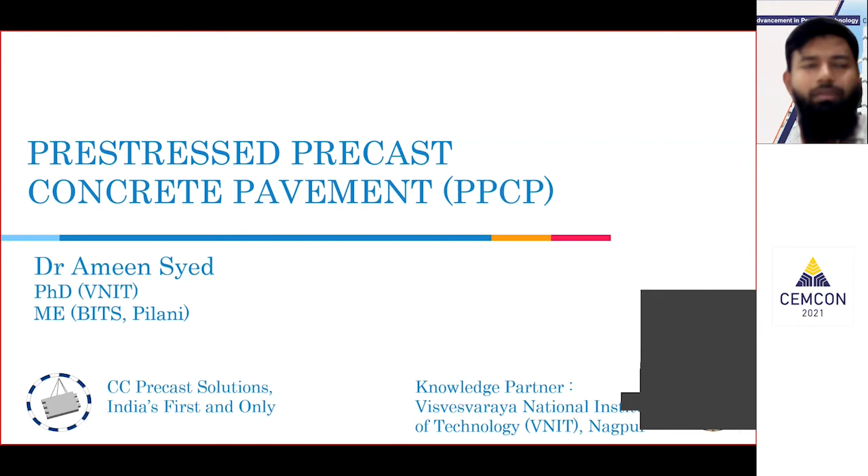As ma'am has already mentioned, I've been working on pre-stressed precast concrete pavement technology. I've completed my PhD in this topic and presently run a company, CC Precast Solutions, which is involved in the construction, design, and overall management of precast concrete pavement technology. This basically started off with the guidance of my PhD mentor, Dr. RS Sonparote. He is an associate professor at VNIT, and the idea of precast concrete road first came to him because of one situation that we faced.

So that inspiration was mainly because we had road construction ongoing right in front of our VNIT campus. His home is hardly a kilometer from there, but just because of that under-construction concrete road, he had to travel almost 3 kilometers to reach his place. So he had this thought: why can't this process be faster? If you make a bituminous road, that works out very fast, but a concrete road takes a lot of time. So he gave me the responsibility to check if there is any scope for development of precast concrete road.

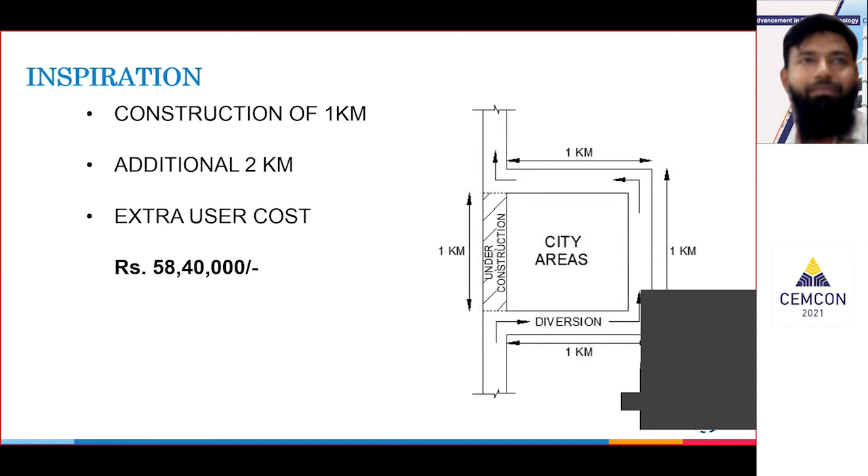So that's why I got into that literature review. And by simple math, we found out that construction of a simple 1 kilometer road requires an additional user cost of 58 lakhs just because of that diversion.

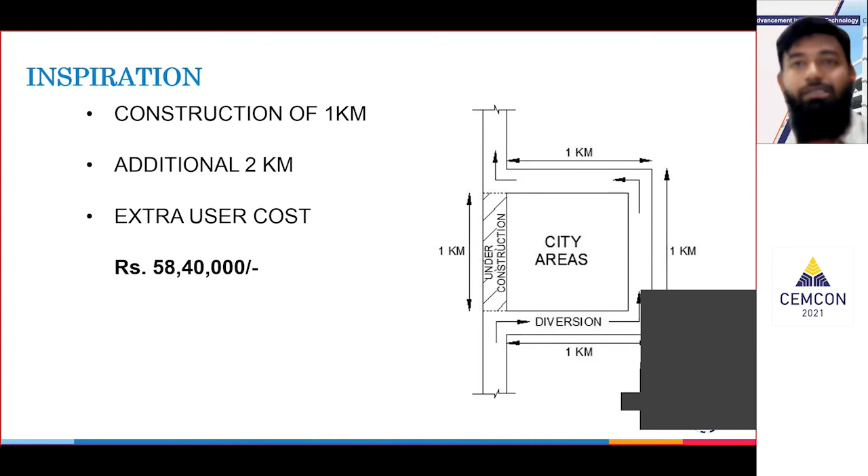Another issue that we faced soon after completion of the concrete road project right in front of our campus - this is the same picture of that road. There were tire marks, pug marks, footprints - all kinds of problems in the quality of that pavement. There were cracks. All of that was because maintaining quality at site for a concrete road is really difficult - it's very hard to stop the crowd, especially when there's traffic jams right next to the road where the diversion is. So people tend to ignore the freshly laid concrete and drive over it whenever required.

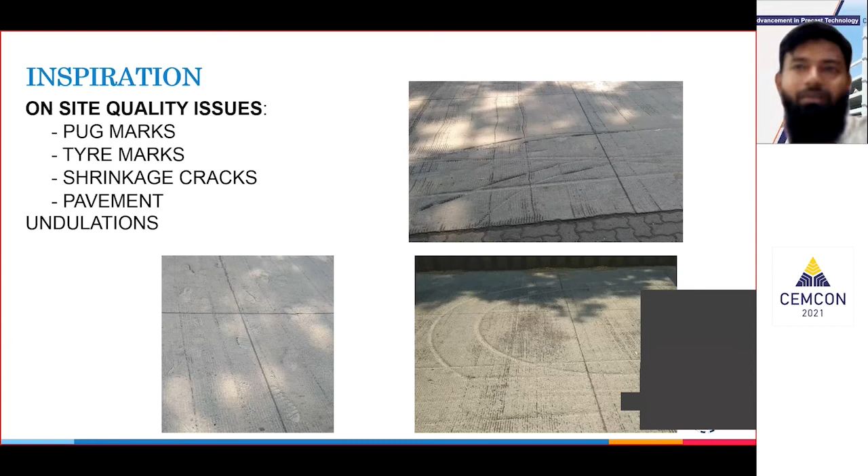We targeted this problem, investigated it, and this is the statistics we got. Traffic congestion in itself causes 1.47 lakh crore annually in a few metro cities in our country. So the cost due to traffic congestion is mainly because of the user cost, reduction in quality, and the cost due to road closure. All of that cost piles up.

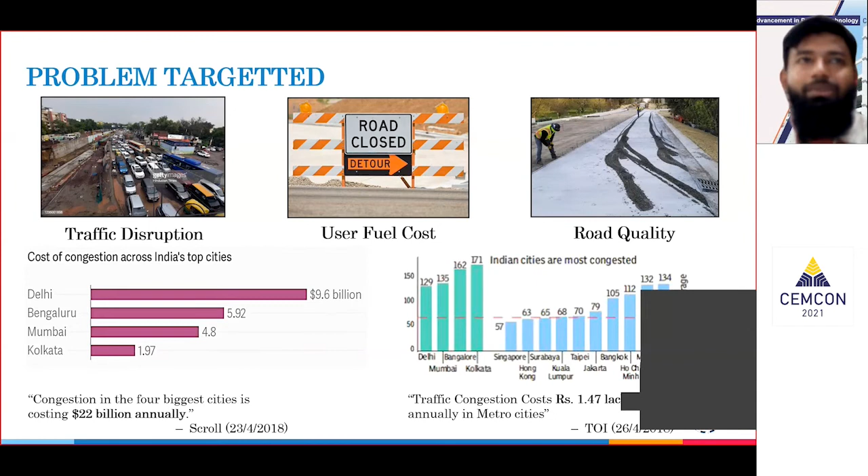So how can we reduce that cost and optimize this process to make a better quality pavement? Adding all of that up, we moved on to this technology.

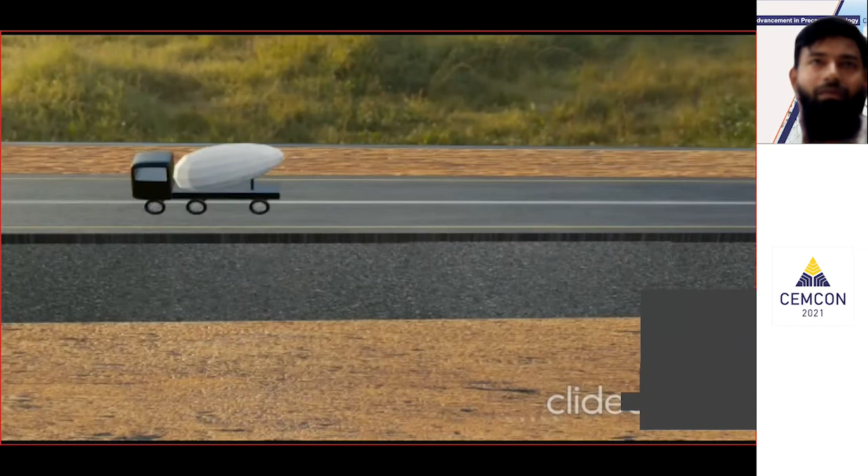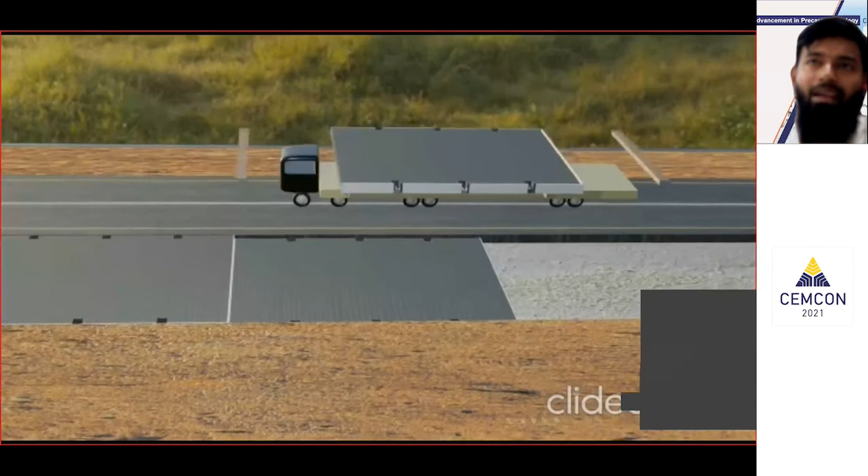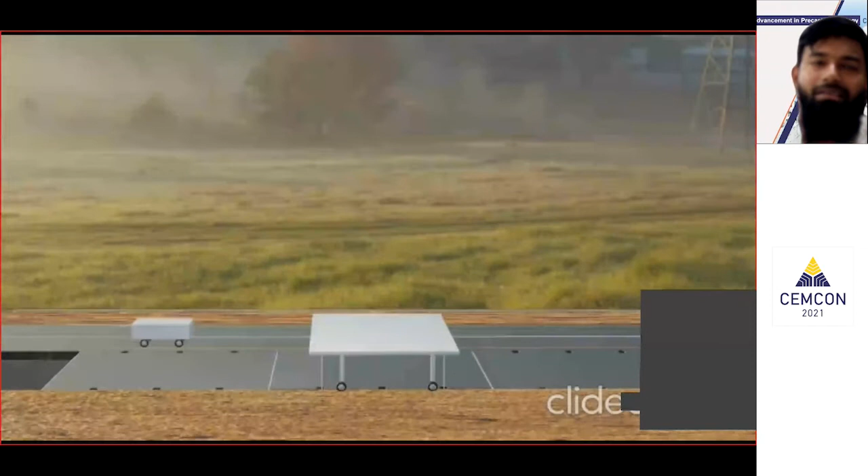This is a brief video, I'll play it now. The simple process goes this way: the milling is done, so the top BT surface is removed and a simple leveling course is laid over it. The panels are transported to the site and simply lifted via crane and placed. Once the panels are placed, if there is any minor undulation because of the base, they can be fine-tuned, lifted, and the base is grouted. Once the base is grouted, the panel fixes into its own position. Then the panels are joined using dowels.

I'll show the details in the coming slides also. The gap in the joints is filled with grout. After this process, traffic can be allowed immediately. This process can basically be done even overnight, and as can be seen here, ramps can be provided.

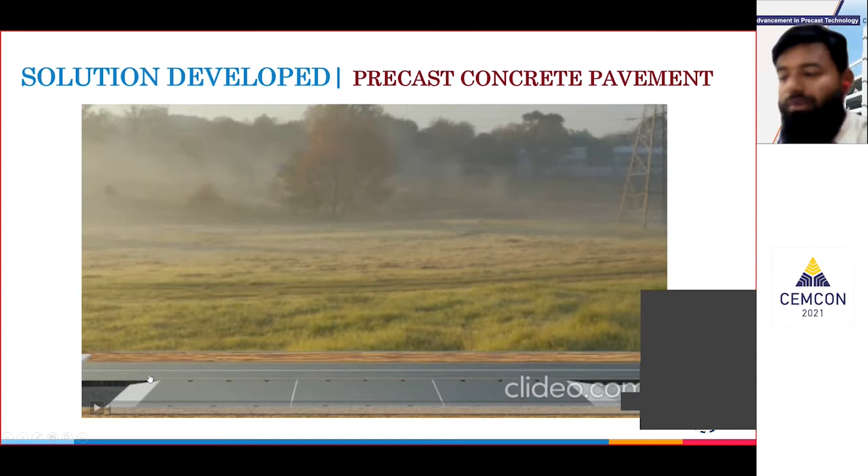Simple ramps can be used, and traffic can be allowed in the morning. The main advantages of this technology are fast construction, and as said by previous presenters, high quality due to the controlled environment in the casting yard.

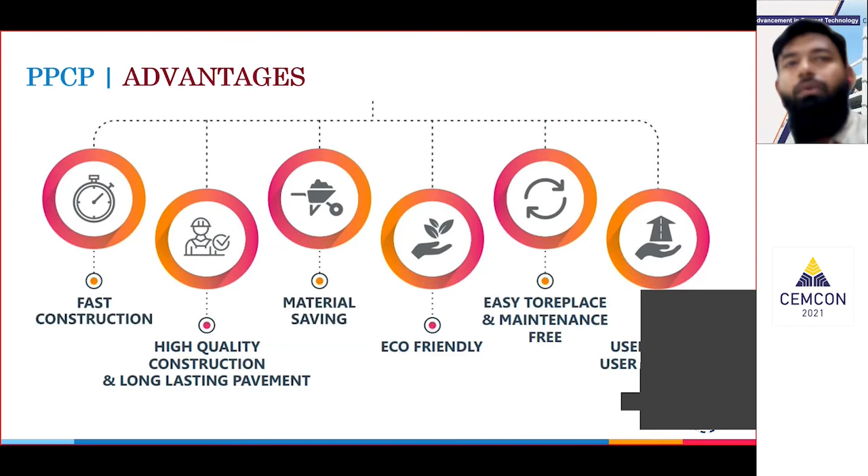If we use pre-stressing or pre-tensioning, there can be considerable material savings, which reduces the burden on natural resources and makes it more eco-friendly.

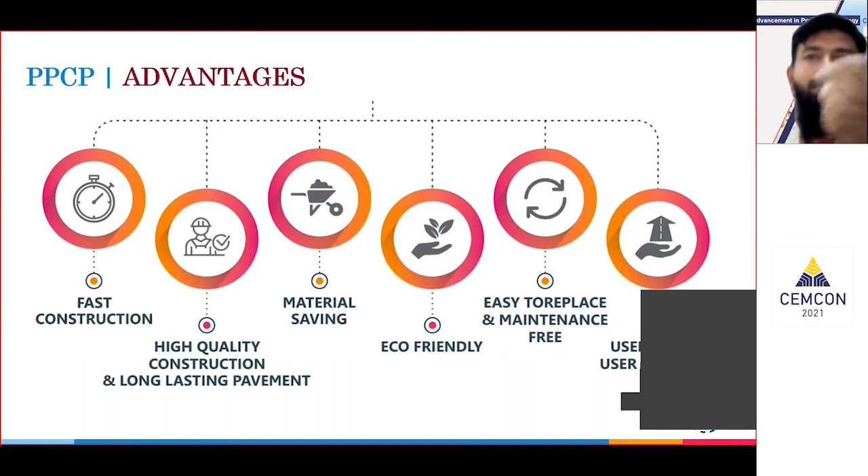We are in the process of developing a precast panel which can be removable, so replacing any pipelines or conduits beneath the road becomes really easy. You can remove the panel, lay the pipes, and reuse the panel.

The limitation is it does not address a weaker base, as any road requires a strong base. If the base is not strong enough, whether it's a concrete road, bituminous road, or precast road, it will be damaged.

Availability of casting yard is not much of an issue; one casting yard can easily cater to a 70-kilometer radius. Skilled labor is required for any precasting work, and lack of awareness and acceptance is a big issue for precasting technology to be accepted, especially in our country.

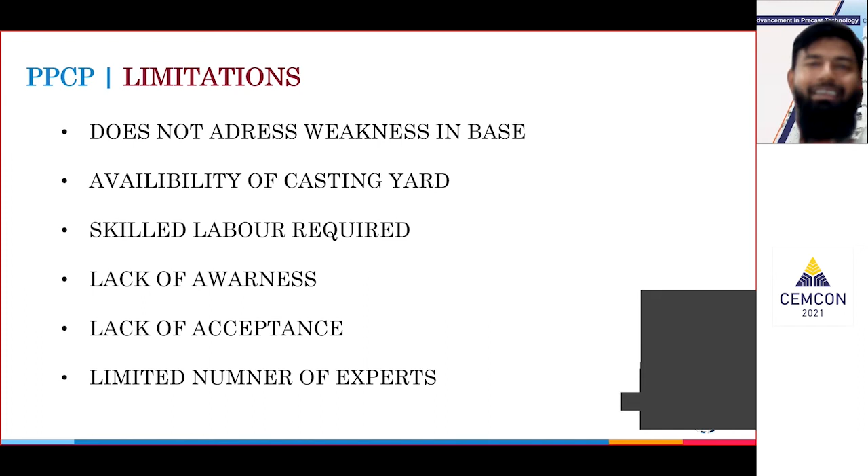The applications we have explored so far include intermittent repair. If a few panels in a concrete road are damaged, you can remove and replace them overnight, so traffic won't be congested and you can easily replace the damaged panel.

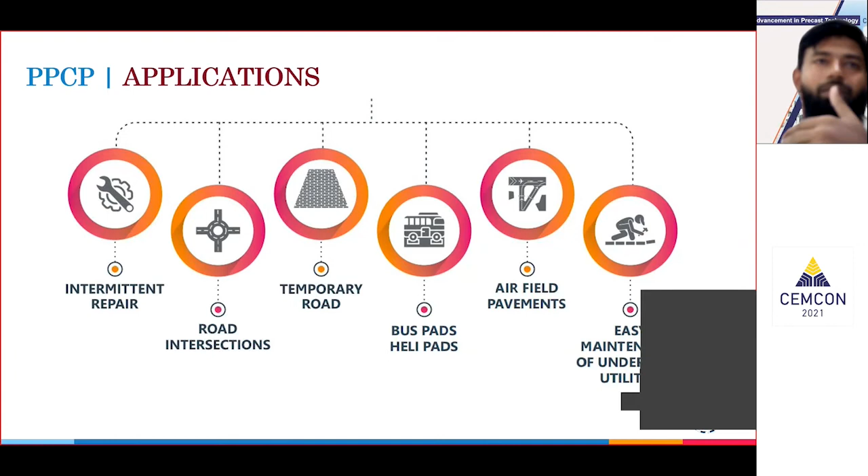Road intersections are one of the main applications, because you cannot close the road or intersection for construction of a concrete road. It requires curing, and if curing is done slowly, intersections get held up. Precasting can help a lot with that.

Temporary roads are one aspect we're still exploring, where, say, there's a construction site or layout area, where a temporary road needs to be laid in one direction, then a permanent road in another direction. The same precast panel can be used for both.

Bus pads and helipads can be constructed using this methodology, and airfields can also be done with this application. As I said, it's easier to do underground utility maintenance.

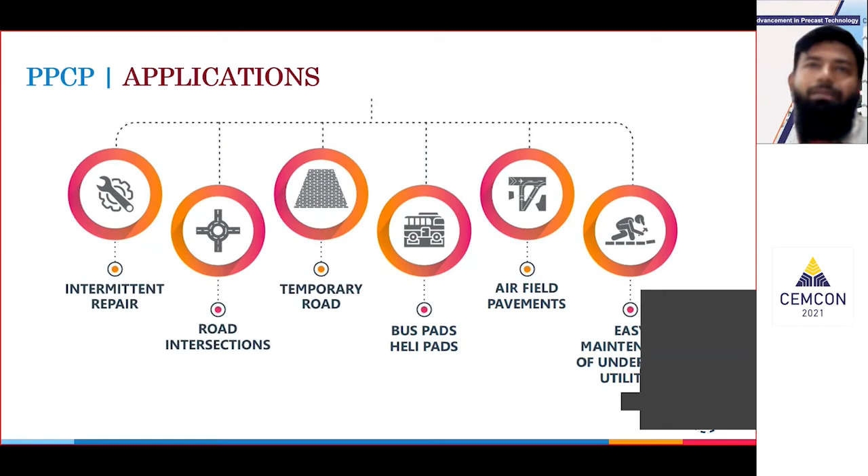There are basically two critical aspects to precast concrete pavement: the jointing of panels, and the base preparation, meaning how strongly you prepare the base.

One of the jointing methods we developed is the lateral dowel method. Two panels are placed such that their teeth are interlocked, and a rod is inserted between them, locking both panels. The pipes coming out are cut later and used to grout the slot. We have tried three or four methods within VNIT campus.

One method is the string method, where dowels can be inserted in one panel. I'll put a disclaimer that every panel needs to be joined with a solid MS dowel, same as in regular concrete road, except here the panels are independent, so the dowel needs to be arranged somehow, as with the lateral dowel method explained previously.

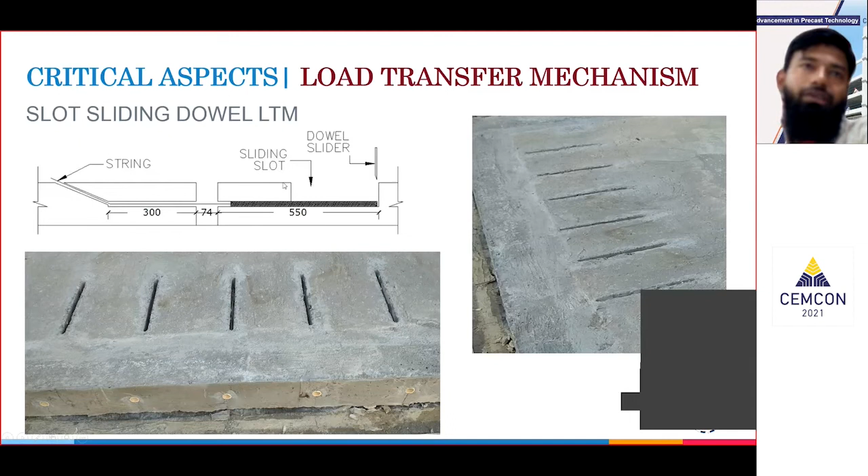Another is the sliding dowel method. The string is there, you pull the string after placement of the panels, and the dowel is pulled between the panels, with the slots grouted later. The dowel can be inserted in one panel and, through these slots, simply pushed into another panel.

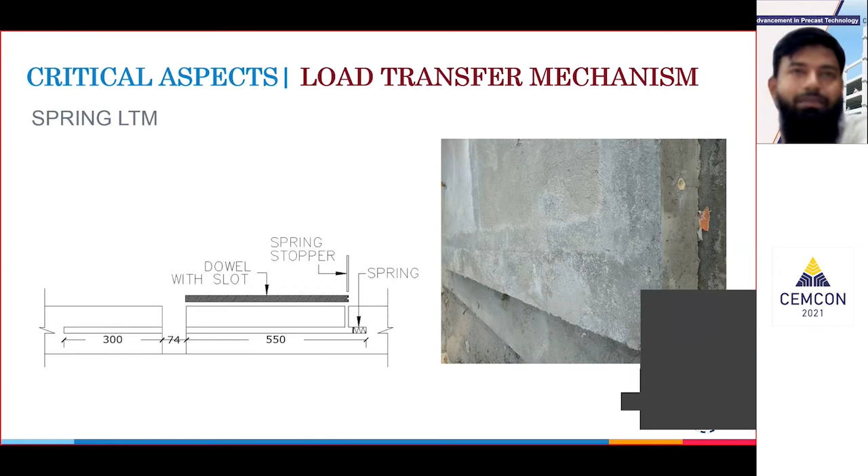One method developed within the VNIT campus is the spring system, where a spring stopper is used. You pull the spring stopper, and the spring pushes the dowel into another slot. All of these methods have been patented by us since we developed them indigenously on campus, and we have done extensive analysis of various aspects of precast concrete pavement, one key aspect being the lifting analysis.

When the panel is lifted, we have a constructed panel as big as 3.5 by 4.5 meters, which comes out to be 6-7 tons of weight. They are lifted at 4 points, and these are the stresses developed in it. So as such, no reinforcement is required, but some nominal reinforcement is provided at the four lifting points, just to make sure there are no accidents while handling the panel.

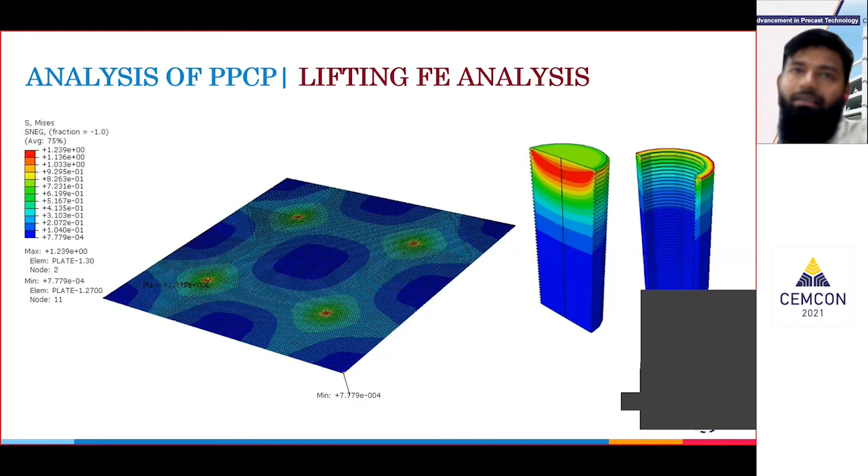The threaded bolts visible in the right figure are the lifting mechanism we have developed. One female threaded bolt is embedded in the concrete, and for lifting, the male bolt is tightened and the panels are lifted. Later on, that slot can be filled with grout.

One of the key aspects is the base preparation. If there's any gap in the base, there are a lot of stresses in the panels and they may crack. So one of the analyses we do is how much width of gap can be tackled by the road itself, and we design our grouting ports accordingly so that the base receives enough grout and air pockets are not there.

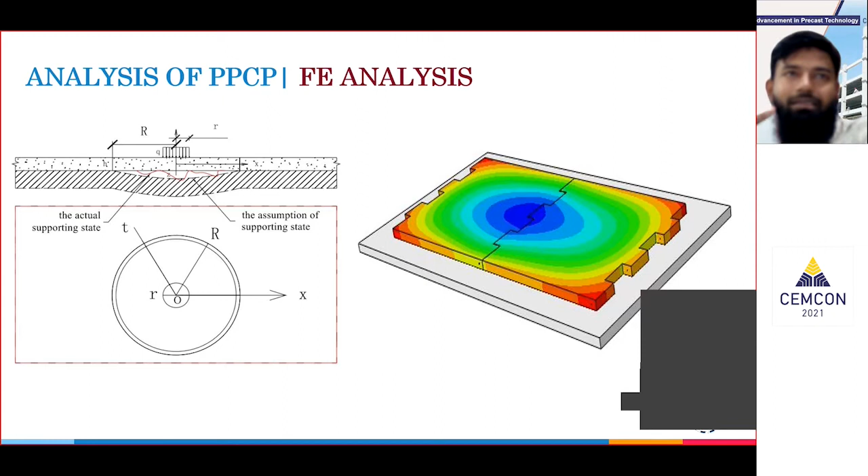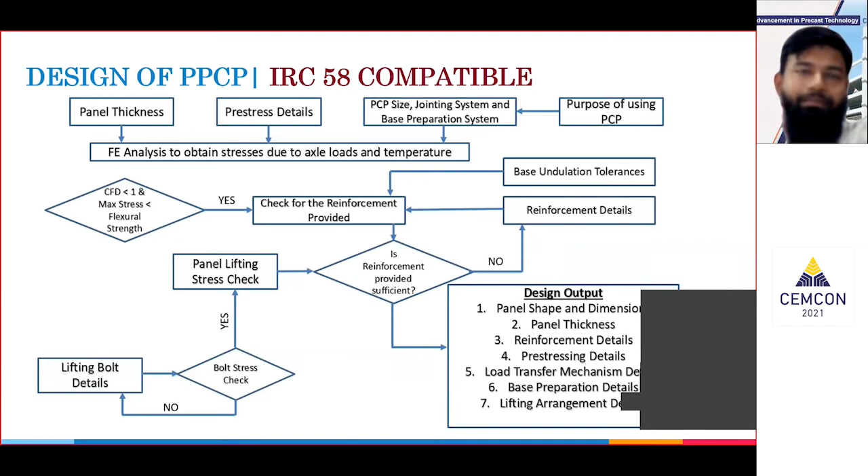This is a chart showing how the design of the precast concrete pavement is done. It is compatible with IRC 58. We did that specifically so that it is more acceptable in India. I'll skip the details of it.

This is the first project that we constructed in VNIT campus itself, and it was India's first precast concrete pavement. To be more specific, it was pre-tensioned precast concrete pavement. Each panel was pre-tensioned, which helped in reducing the thickness.

As can be seen in the details on the right side, the panel thickness was only 150 mm, whereas the adjacent panel was 250 mm thick. So we saved 100 mm thickness of concrete, and in road construction, that 100 mm thickness reduction for, let's say, 1 kilometer, is a huge saving of material. In this, the lateral dowel jointing system was used, the one which I had shown previously.

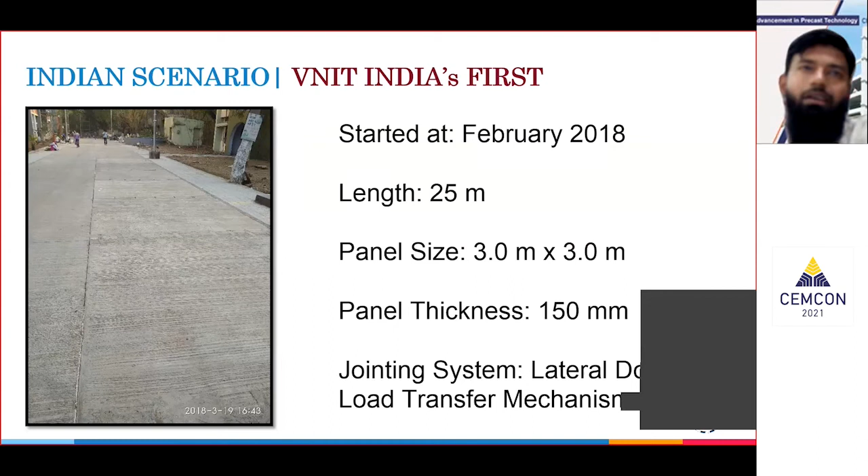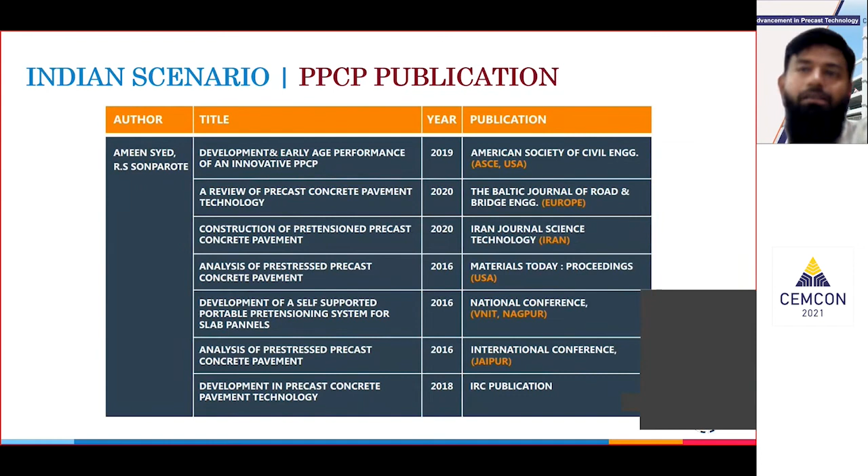The panel sizes were 3 meter by 3 meter. Smaller sizes were used because this was just a trial stretch, a small 25-meter road. After completion of this, we were able to have multiple publications based on this trial in ASCE, in Baltic Journal, in Iranian Journal, and we were able to publish it widely within India also.

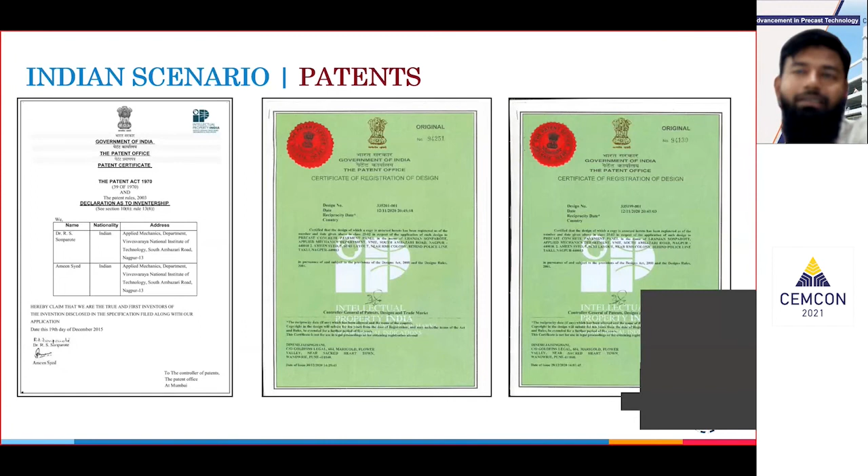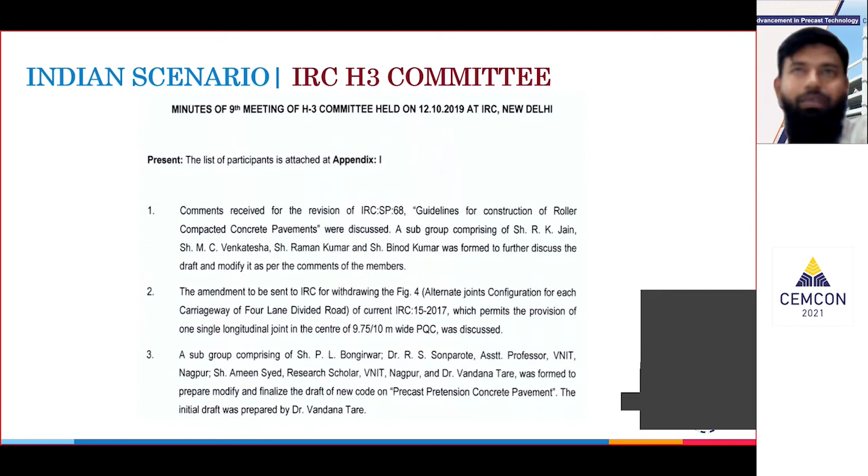These are the patents that we have got for this technology. And like ma'am had explained, we were blessed to be able to get added in the IRC H3 committee. We are in the process of developing the IRC code for this technology. Of course, the code printing and publishing takes time, but the process has started, so that's at least there.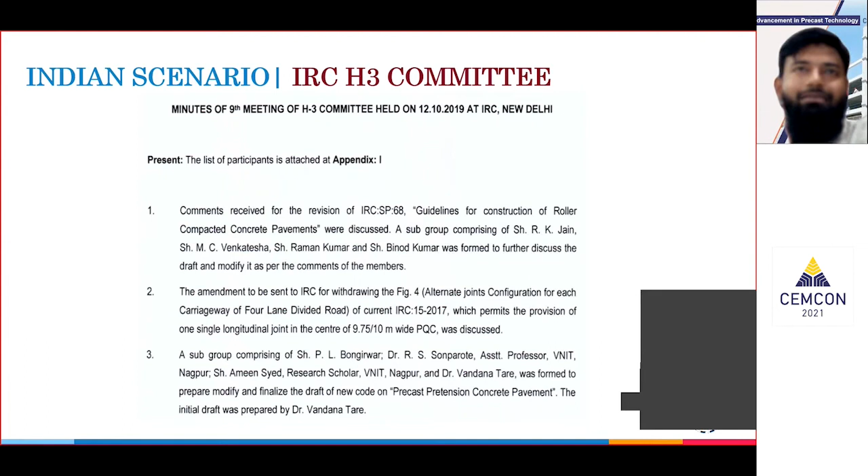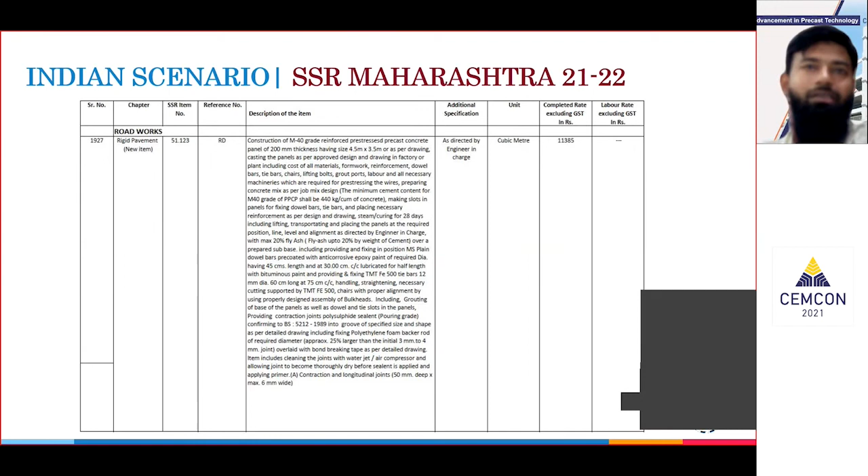In order to get this technology more accepted, we had to get it added in the schedule of rates. So this has been added in the PWD schedule of rates in Maharashtra. That has actually given a good boost to the technology, and we have started seeing some tenders being made, so that they'll be published and this technology will be more accepted once we get this process done.

So once the panels reach the site and are laid, there won't be any flaws in them. Any flaws, if there are any, will be detected in the casting yard itself.

Another casting yard has been established by us in Amravati, and both of these casting yards use similar technology, so I won't dwell much on this slide.

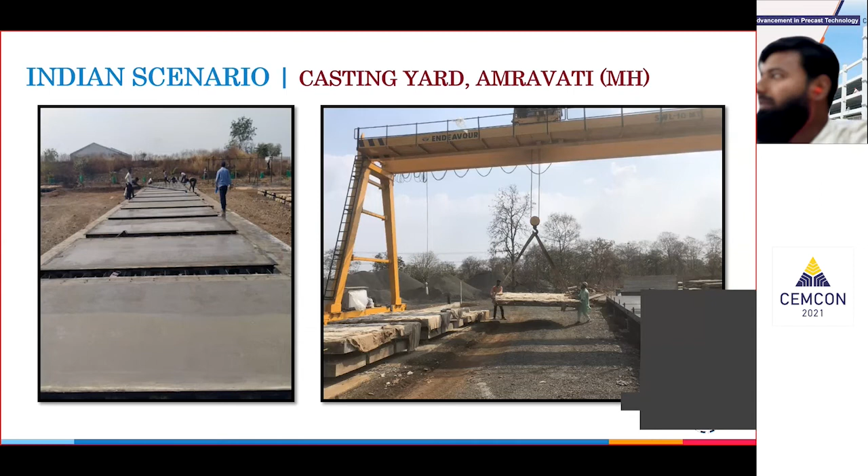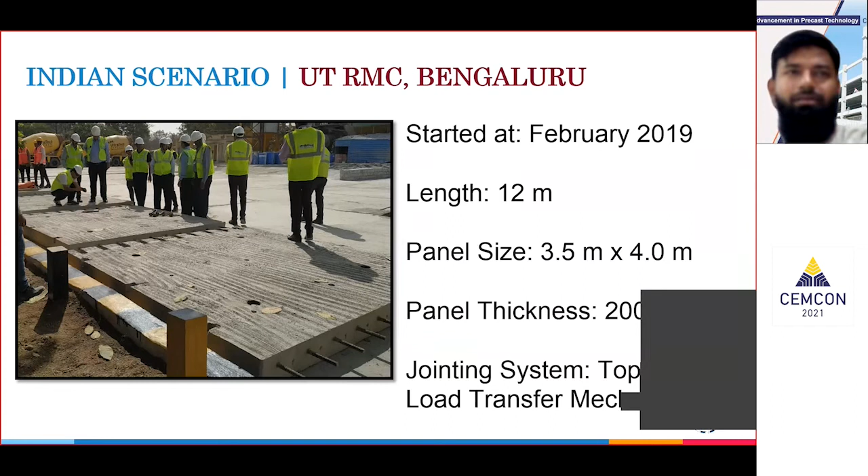After completion of the first project and establishment of the yards, we were able to convince various companies. Ultratech gave us an opportunity in their RMC plant in Bangalore, where we constructed a trial stretch of just 12 meters. Based on that, we are now in discussions with BBMP for a 300-meter road where we will construct precast concrete pavement.

One road we completed is in Rajeev Nagar, Hingna, near Nagpur in Maharashtra. We started this project in October 2019 and completed it really fast, getting good responses from local people. The problem was this was the only access road to the residential area ahead, so it couldn't be closed, and whenever a bituminous road was built there, there were quality problems. A concrete road had to be constructed, but authorities were wondering how to do that without closing the road. So that gave us a good opportunity, and we introduced precast here.

It was a 450-meter road length. The panel size was 2.75 by 3.5 meters, and the total width of the road was 5.5 meters, so we had two panels of 2.75 each. The PQC design here had a thickness of 300 mm for cast-in-place concrete, while precast had a thickness of 200 mm - so again, a 100 mm thickness saving. That's what we maintained here, and we got a lot of appreciation for it.

In this project, the sliding slot load transfer mechanism was used, like I had shown in the previous slide. The dowels were slid into the other panel, and the holes were grouted later on. This photo is before the grouting process.

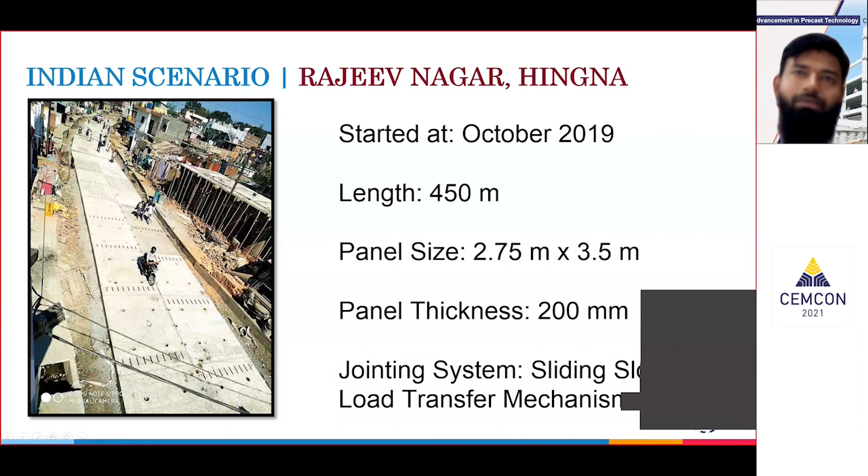This was the third project, again near Nagpur. The situation was the same - the width available was really less. Had a concrete road been constructed normally, diversion was not possible since alternate routes were small lanes where heavy trucks couldn't move. So we had to finish it very quickly, and we switched to precast. Just 125 meters was the congested length, so we focused just on that much.

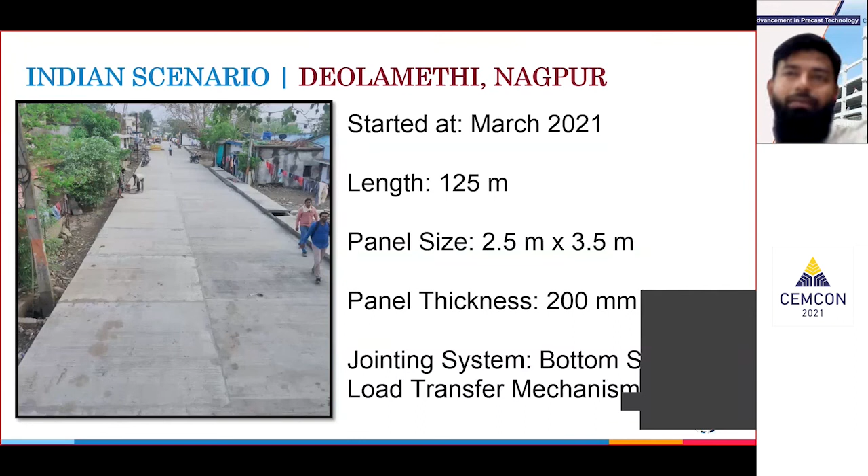Since these projects were constructed, they have all been working very well - no cracks, no problems with the road, and it's been almost 3-4 years since the first project. This was a 7-meter wide road, so we had 2.5 by 3.5 meter panels, with 3.5 and 3.5 adjacent panels kept that way.

This is another ongoing project - I just came from the site. This is a really crowded area, Pathan Chowk in Amravati. The traffic here is so dense it's difficult to even walk there, and it stays dense till 11 p.m. Traffic starts again in the morning with vendors - there's a sabzi market here that starts around 4 a.m. So we get a really small working window.

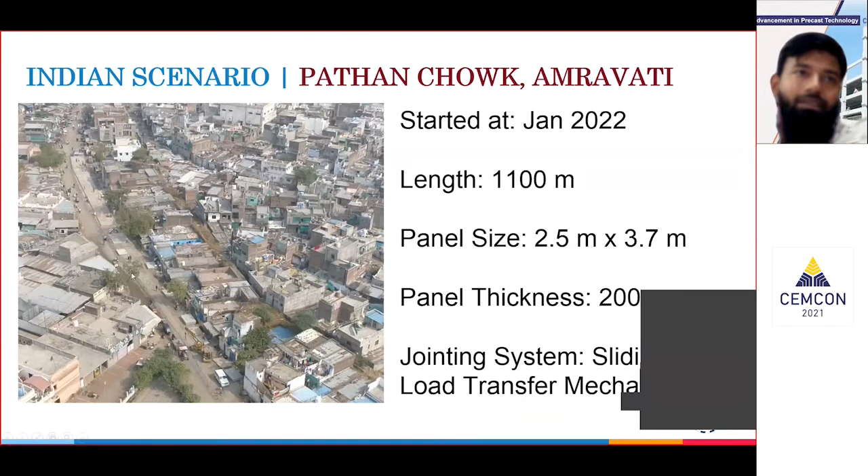There we are constructing a precast concrete road. It's a 1.1 kilometer road, and we completed around 100 meters - today we completed 150 meters, finishing 50 more meters of lane. This system is similar to the sliding slot, except here the panels are slid in and the dowel slots need to be grouted, along with the base. The grout material is also developed by us - we have optimized it financially and in terms of strength. As you can see, half the width has been covered, and the other half will be taken up as soon as this is completed.

Once we started this technology and designed it for the first project, the authorities were a little unsure whether we'd be able to design it properly. So they involved Dr. Mehdi Parvini, a pavement engineer at the California Department of Transport. He supported us a lot, helped us a lot, proof-checked our design, and appreciated our efforts. After his involvement and visit, the authorities were finally at ease and ready to construct the first precast concrete pavement.

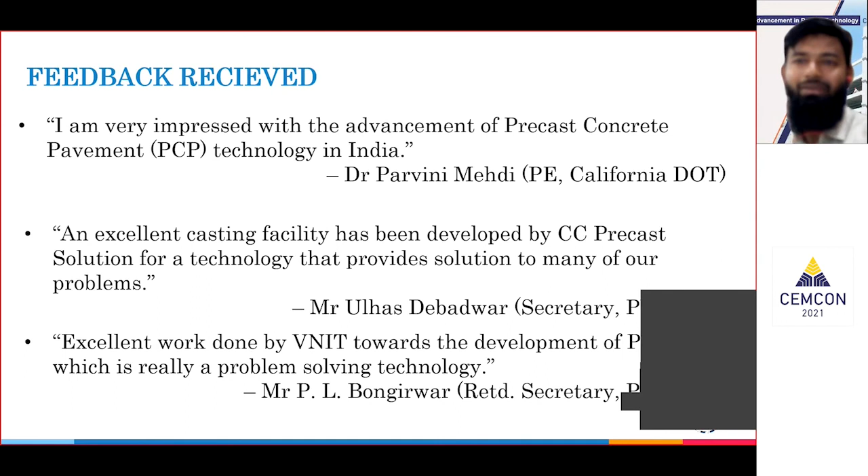After we completed the first project, we received a lot of appreciation for the work, even from Mr. Ulhas Debadwar, who was Secretary PWD in Maharashtra, and Mr. P.L. Bongirwar. We got a lot of support from Bongirwar sir. He was involved with us from the first day, and till now he's involved with us. He's been actively participating in the development of the code, and he is the one who has been pushing for the development of code and manual for precast concrete pavement.

And of course, when we constructed the first pavement, Gadkari sir was there to appreciate us. He was involved in the IRC conference. He visited our site, appreciated the effort, and he has been supporting us immensely, I should say, in terms of moral support more than anything else.

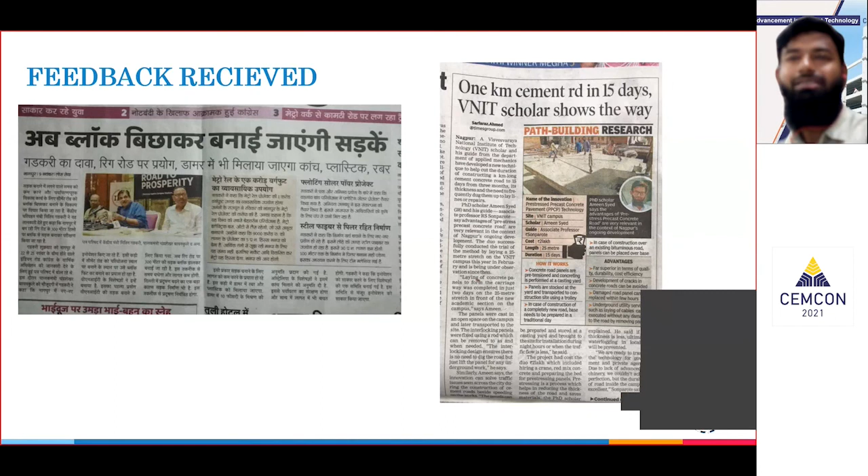We have also been appreciated by other journals and newspapers, and that has helped us a lot in growing.

Finally, this technology is really new. It's been in the world for like 21 years, and its design life is 30 years minimum. So there's no code for precast concrete pavement throughout the world. There has been a manual for general guidance, and like every technology, this has scope for improvement. It is still a young technology, still growing, and I would really appreciate everyone's comments and help in developing it further.